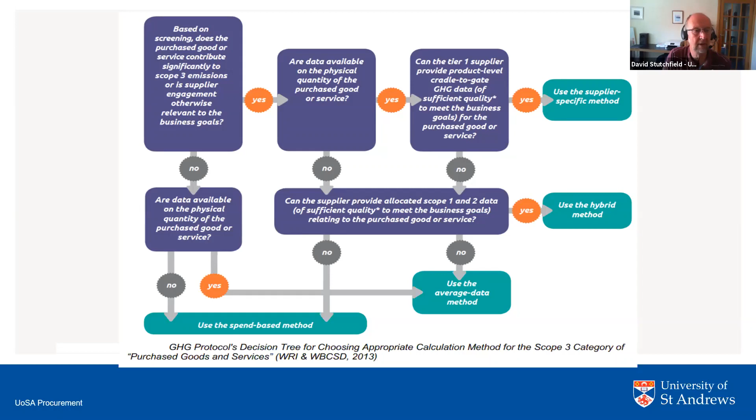We just took a single project that we had done, which was a £10 million project, and tried to understand what the carbon outcome was from all the different ways that we could calculate that. All of the data was ours, but the student then worked through that and did a really good job of it.

So taking a simple spend-based method, we went through the design team. This was a building that had just been completed and commissioned, but we went back to the bill of quantities, and the sum of the value was £10.3 million. If you apply a simple DEFRA emission factor for construction of capital projects, then the emissions of that building were 5.7 thousand tons of carbon. So that's a starting point, that's just a straightforward case of, okay, we've gone one better than HESCET. We've actually broken this out and put a DEFRA factor against that spend.

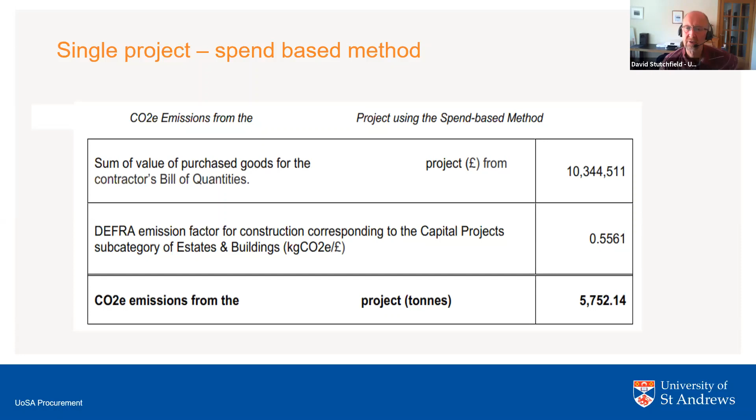So we then looked at drilling down on the bill of quantities. This is produced for every single project, and is where the project team estimate what the costs are going to be based on the designs, broken down in more detail. We can see that we've got 0.32 tons of straight bars and 0.48 tons of bent bars. This spreadsheet is huge for the whole project, and was shared with the student for her to do the analysis on it.

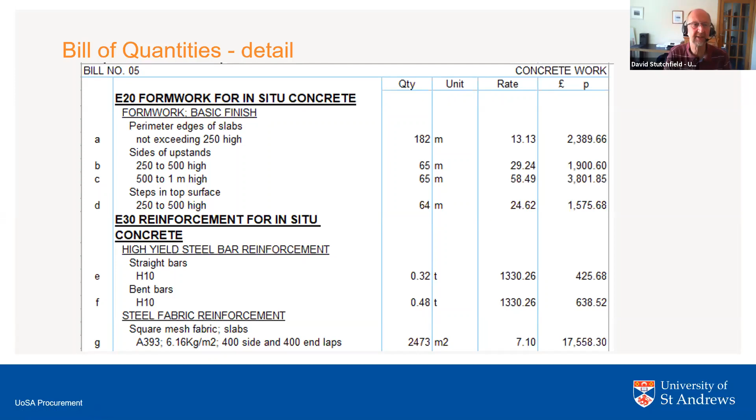So she started looking at the ICE database tool and going through each of these on an average-data process. You're not supposed to read this table, but there were a lot of elements. She went through every single element, looked at the quantity, and there was a lookup table that gave us the embodied carbon for that. So she's gone through every single element in that building based on the bill of quantities and worked out what the overall carbon was.

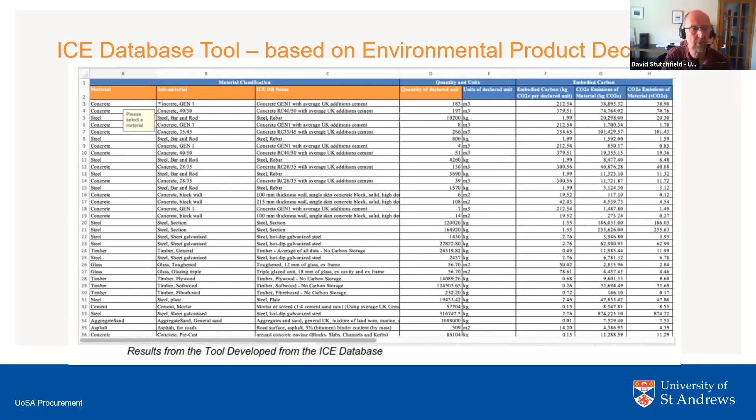The summary of that process is that steel was 70% of the total emissions of the project, concrete was 15%, glass was 3%, and everything else was below 3%. We even break it down to sheet galvanized, reinforcement, stainless, and the different types of concrete. So that's showing that within this particular construction type, steel was by far the greatest carbon contributor.

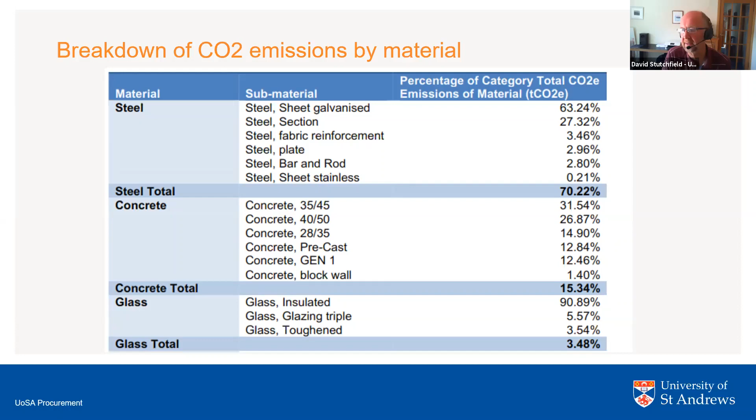So the other alternative method is a supplier-specific method, using the environmental product declaration. All of the major construction products we use have an environmental product declaration. Kingspan, for example, have done a cradle to grave life cycle assessment on their products and can give you a carbon factor for their products.

So this is the detail of the product declaration. There's a lot of information there, but the figure we're using is 44.6, in the top left corner. That's saying for this product, which is 40 mil thick, wherever you use it, the embodied carbon is 44.6 kilograms of CO2.

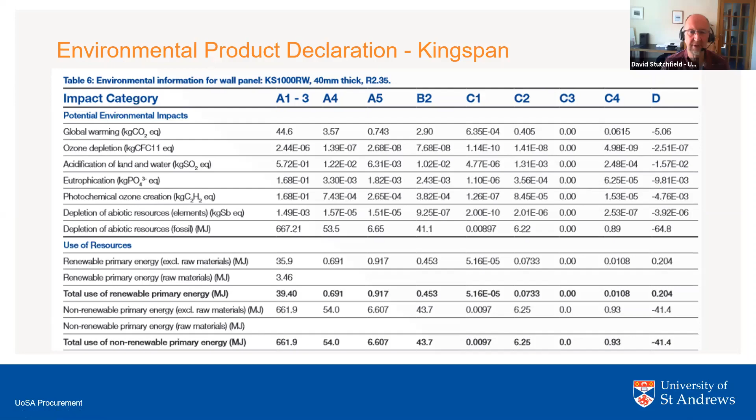The student worked out how much of that insulation was in the project and did a comparison between the supplier-specific and average data methods. From the average data, using the ICE database, we had 9.32 tons of CO2 from the total, breaking it down into insulation and steel. But from the environmental product declaration for Kingspan, that's actually higher - 14.2. So the more granularity you get on accuracy, we found that Kingspan had a declared embodied factor of 44.6 per square meter for that elemental stuff.

So we were doing this comparison between the two methods of how we could calculate the carbon for this building. Obviously the supplier-specific method is more accurate because it's based on the actual product that we install.

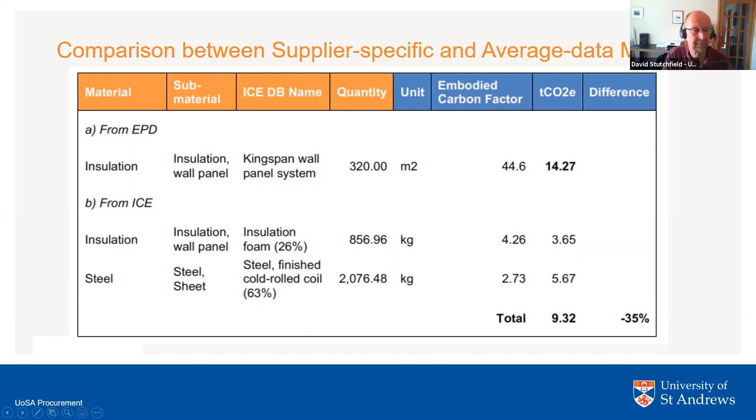One of the outcomes of that was that it required the contractor to collect the energy performance and environmental product declarations for all of the material suppliers. But it was a nightmare for us to try and do that as a retrofit. Having to go back and think about it, it was really, really difficult.

One of the key outcomes was that we do need to specify this at the beginning of the project, but actually only large contractors will have sufficient experience to be able to do that, and there may be an additional cost. It was interesting that the head of procurement of the contractor said it has to be a mandatory requirement - the contractor can do it, they just have to ask. So we have to specify that.

We specify BREEAM for all of our buildings - we have to have BREEAM Excellent as our minimum standard. To do that, they need to look at all the elements of the building against the Green Construction Guide. There's a lot of work that contractors are building into that. When they're doing a BREEAM construction for us, they know about this and can price in the extra work, because you end up with huge amounts of certification that goes to the BREEAM assessor to prove that what you've put in is actually the right product.

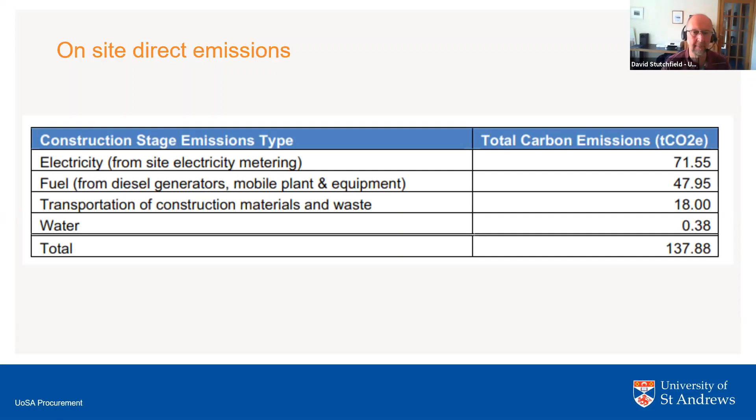So we looked at the two processes and realized we couldn't do the whole analysis on a supplier specific basis. So we needed to have a hybrid method. We went for a hybrid method, with two parts: bottom up and top down, and ended up with an estimate of 7,062 tons.

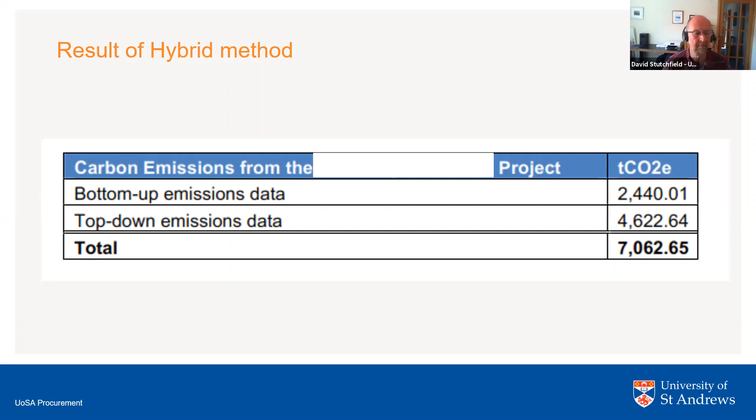In comparison, we've just used a spend-based method. We said we spent 10 million times a carbon factor, which equals 5,700 tons. We then went through 3 months of detailed analysis work and came up with 7,000 tons. So what that's telling me is that the spend-based method is in the ballpark. It's there, but there is a difference.

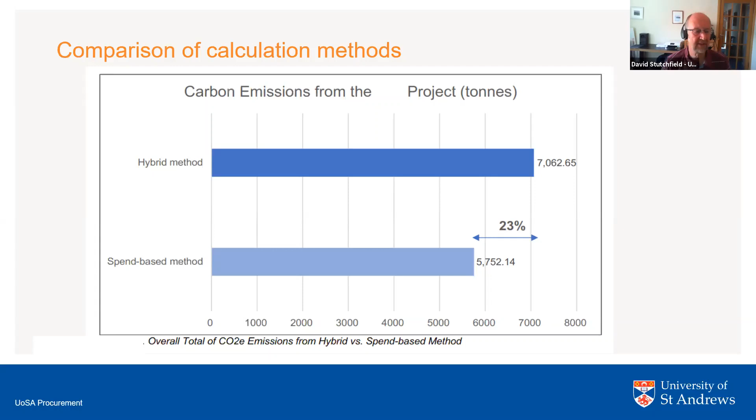So in general, there is an increase from that process. We've looked at all of the calculation methods for a single project, and found that the hybrid approach is the most practical for a project specifically in St Andrews, because this outcome is only for the project we did in St Andrews with the type of construction we used there. More resolution leads to higher emissions, but all calculations were in the same ballpark. We learned that it's hard to do this retrospectively. There was significant resource needed, and this needs to be specified at the start of the project.

For a traditional construction building in the central belt, it may well be that spend-based methods are okay, and obviously more research would need to be done on that. Spend-based methods are so inaccurate that it's just saying we always say if you spend more on an energy efficient product, then your carbon emissions go up.

But actually, doing the granularity allows you to then look at, actually, if we were to reduce the steel, is there any part of that steel work that we can make a timber frame? Or can we reduce the amount of concrete in the building? That's where we can actually show that the embodied carbon is going to be reduced.

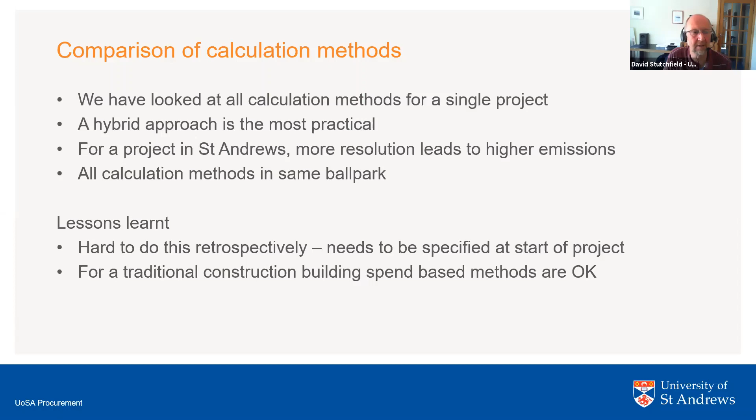The key questions going forward are, how can we improve the carbon data and build these into our baseline reporting across the sector? So if we as St Andrews start saying our carbon footprint is 23,000 tons, or even higher, if you add all of our travel emissions, student commuting emissions, and student travel from home emissions, then we're up about 60,000 tons. So if the university puts in 60,000 tons as our carbon footprint, and we've used a specific method from the procurement side, what is the equivalence with other universities' footprints?

And are we just inflating the whole process? So how can Scottish Procurement and APUC take the lead and make sure that it's all standard? The sustainable procurement duties and the climate change reporting duties should go hand in hand and pull that together.

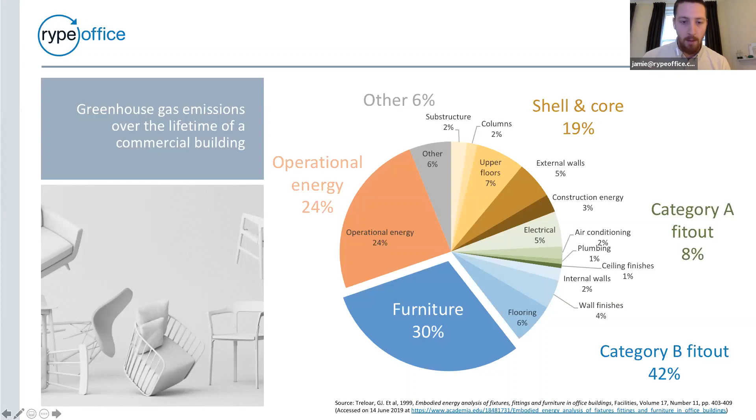So this is essentially our business model. We are based around the fact that at the start, we understand customers' requirements. Practically, we have a team of trained interior designers and architects that can work either collaboratively with outsourced interior designers and architects you're working with, or we can do it ourselves, and we do that for free.

We then begin to source secondhand furniture as a feedstock for our circular economy processes. We can do that from your existing stock, from the site itself and existing offices, or from the secondhand market.

In the UK, we send 75,000 tonnes of office furniture to landfill every year. That equates to 300 tonnes every working day. There's a huge amount out there. And from the perspective of a company like us, it's very easily accessible, and we don't have to charge a lot to do it.

Once we've got a second-hand item of furniture, we remanufacture it. For us, that's a quality-controlled engineering process. We break it down to its constituent parts and then remake it as new, so it both looks and performs as new. That is, to reiterate, a quality-controlled engineering process.

It's something that Caterpillar have been doing for a long time on engines, and Ricoh have been doing it for a long time for printers. If it can work for a tank, it can work for a desk chair. It's not that complicated, but we do take a lot of pride in terms of the engineering processes we put into it, and have an ex-aerospace manufacturing manager running our facility to do that.

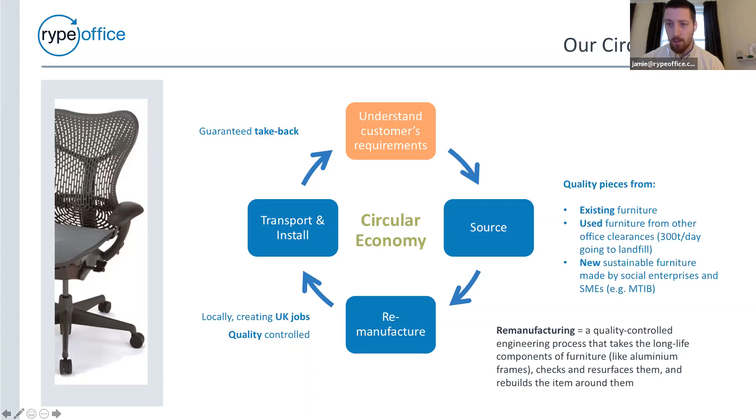That's an integral part of most circular businesses, and also really de-risking. It makes it easy to facilitate innovative forms of financing like leasing, etc. That's a key part of what we do, and I know what a range of other suppliers do as well. So that's kind of our circular model, but it's broadly shared by a range of other suppliers, which I'm going to talk about further down the line in the presentation.

The next logical question here is: does a remanufactured item actually result in something that looks and performs as new, or are you just going to clean it down and sell me a second-hand chair? The answer is unequivocally it's the former.

Just to display that, the chair on the left is just an indicative example. We've remanufactured thousands of different models of chairs over the course of our existence. The chair on the left is the remanufactured one, the one on the right is the new one. You can see visually that they're exactly the same. The only difference is that we messed up the photo shoot and got the arms the wrong way around because they're telescopic arms. Apart from that, they're exactly the same and they perform exactly the same.

The differences, however, begin when you look at pricing. This is 20 to 30% lower than framework prices. What that means in reality is this is a 768 quid chair new at list price, and we sell them for 160 to 210 pounds. So you're looking at really, really significant discounts.

It has an 80% reduced environmental footprint. It's made in the UK, so it can create real meaningful community jobs. And it's a high scorer for WELL, BREEAM, LEED and SKA as well, although I haven't put SKA in here because I realised that lots of people don't really care about SKA anymore. We can provide the same warranty as new items, and there are large volumes available.

Just as an example of what large volumes means, we signed a contract for 3,000 of these from Goldman Sachs, which we can remanufacture to as new using, for example, the same mechanical polisher that Orange Box used in the original process. And if we have to powder coat, our powder coat is often better than the original equipment manufacturers as well.

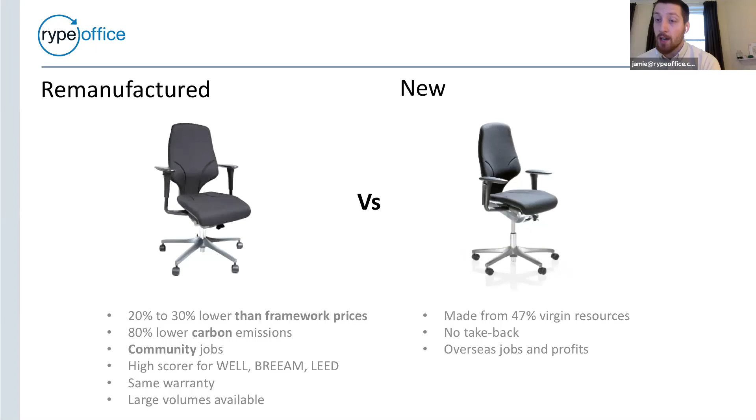I think for me, one of the interesting things about the circular economy is when circularity is combined with innovative and interesting product design. We're starting to do that quite extensively in a number of different ways.

So the item on the left is a remanufactured Vitra desk frame, and on top is a board made from post-consumer waste plastic - kitchen chopping boards and black plastic wrapping, shredded, heated and squished into a board. That is made by an amazing company called Smile Plastics, who are designing a whole range of furniture collaboratively. And again, the chairs surrounding the meeting table are remanufactured as well.

The image on the right is a prototype. This is hot off the press, and unless you went to the other presentation I gave, no one has ever seen this before. This is a sofa we're working on. We are modestly calling this one the most sustainable sofa in the world. It has a frame made from post-consumer waste plastic.

Fillings are all natural materials. The upholstery is recycled. The zips are made from ocean plastic. And the stitching used in the upholstery is dissolvable by a heat gun, so you can take a heat gun over it, then pull it apart, rewash it and use it again. It's modular and will be sold with a carbon offset and a buyback offer as well.

So the point is that when we think about circular economy, we normally think about just taking something that had a previous life back to as new. The reality is that advances in circular economy thinking, both in the furniture sector and across a broader suite of furnishings, are such that you can not only make something as new, you can make it better than new as well, which is quite interesting.